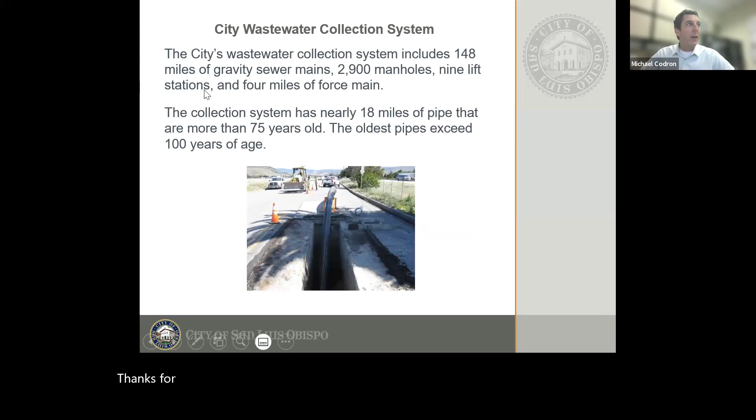Thank you, Michael. To kick it off, quick introductions: my name is Chris Lehman, I'm the Deputy Director of the Wastewater Division for the city. Also on the call with us is Ryan Beech, the Wastewater Collection System Program Supervisor. We have a few other people on the call as well who might be able to answer some specific questions - Miguel Barcenas, our Deputy Director of Engineering and Planning, and also our Utilities Director, Aaron Floyd.

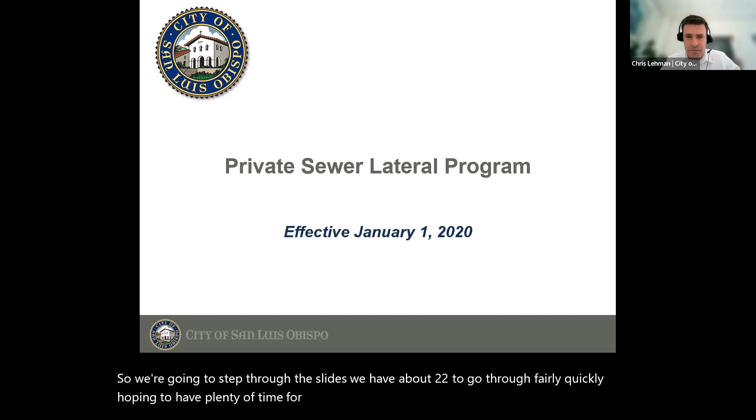We're going to step through the slides - we have about 22 to go through fairly quickly, hoping to have plenty of time for questions, but feel free to stop me if you have one specific to the slide. Ryan's going to kick us off with a little bit of background about our collection system.

From the first slide, this program was implemented January 1st, 2020. We've done a lot of work so far. The city's wastewater collection system includes 148 miles of gravity mains, 2,900 manholes, 9 lift stations, and roughly 4 miles of force main. The collection system has nearly 18 miles of pipe that is more than 75 years old, and the oldest pipe in the system is over 100 years old.

So from that slide - a super old system, a lot of maintenance. Surprisingly, some of that pipe, 75 to 100 years old, is still working, and that's pretty much it.

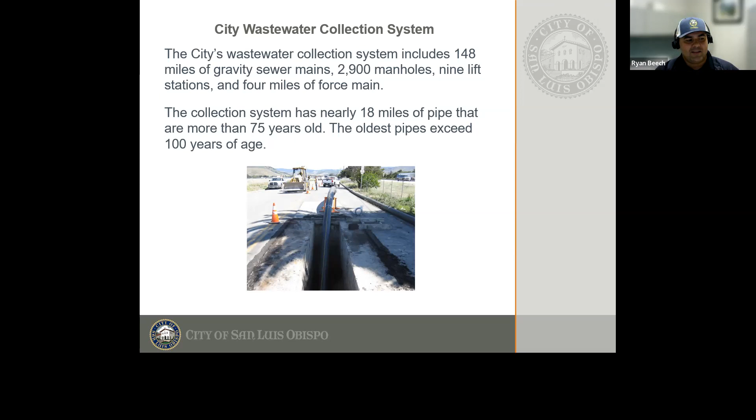Since 2007, the city has invested approximately $33 million in upgrades to the collection system. Again, a lot of aging sewer, a lot of work out there. This is a picture of our Laguna lift station - a lot of that money is going into new lift station construction and replacement.

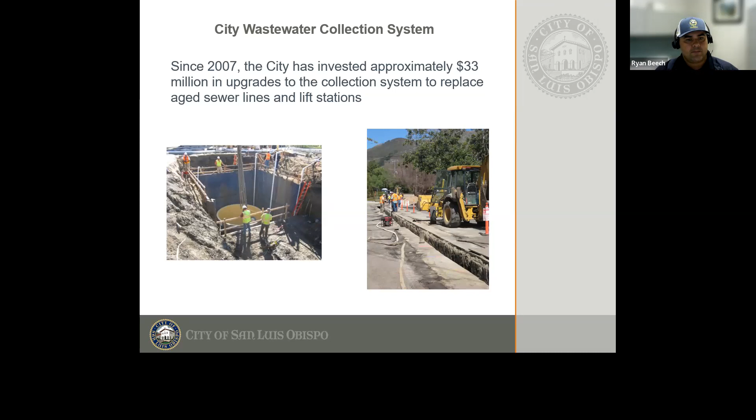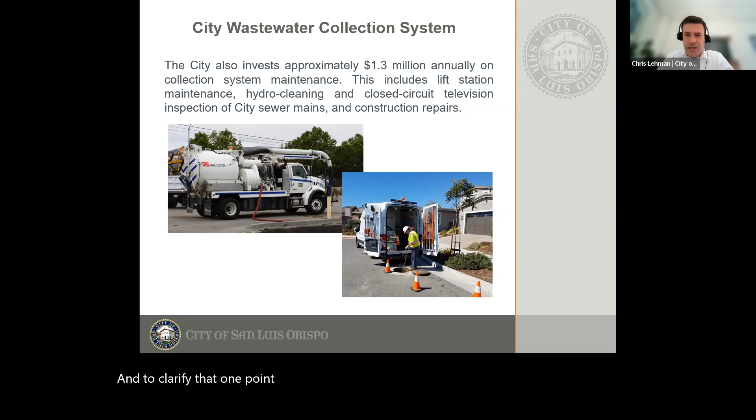The city has invested approximately $1.3 million into the collection system - into lift station maintenance, hydro cleaning, CCTV inspection, and just day-to-day construction repairs to the system. To clarify, that $1.3 million is annual, our operating budget. The $33 million is capital improvement projects.

Thanks, Ryan. I'll take it back for a few slides. That leads us into our topic for today, which is the private sewer lateral program. I wanted to start with a little bit of background on how we ended up where we're at today. A lot of this is probably a refresher for most people on the call, but I thought it was important to start with the origin of the program. There's a lot of information on this slide, but essentially the program's intent and goals are to prevent sanitary sewer overflows.

We have a series of permits issued by the water board that we have to maintain as far as treatment and conveyance. We also have third parties like California River Watch, advocacy groups looking out for environmental protection. This all started in 2015 when we were issued a notice of violation, and they intended to file suit under the Clean Water Act against the city. So after a series of negotiations and a lot of work with River Watch, we ended up with a settlement, and that is the foundation for the program as we have it today.

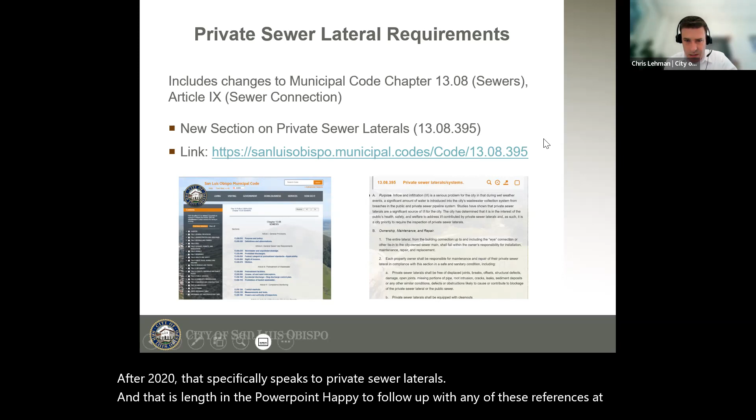Everything we're talking about today is referenced in our city municipal code, and there's a new section after 2020 that specifically speaks to private sewer laterals, which is linked in the PowerPoint. Happy to follow up with any of these references at a later date, but we will get into some of the specifics of this chapter.

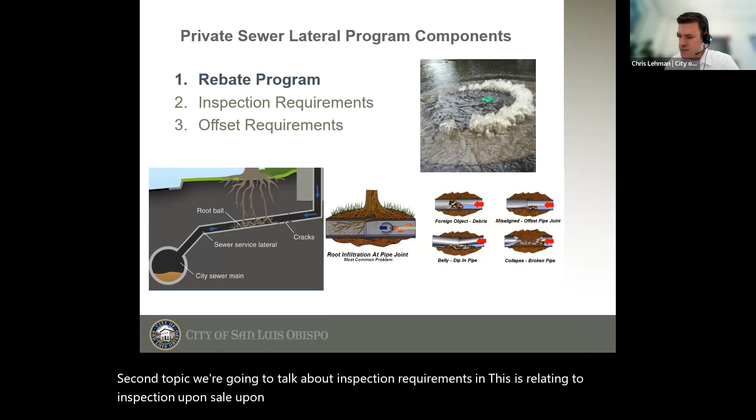The first program we're going to talk about has really three elements to the private sewer lateral program. We'll discuss rebates that incentivize private homeowners to replace laterals that might be in poor condition. Second, we'll talk about inspection requirements relating to inspection upon sale of a property. Then we'll end with the offset requirements for development and intensification in what we call our capacity constrained basins—areas throughout the system where we don't have any more room in the pipe for additional flow.

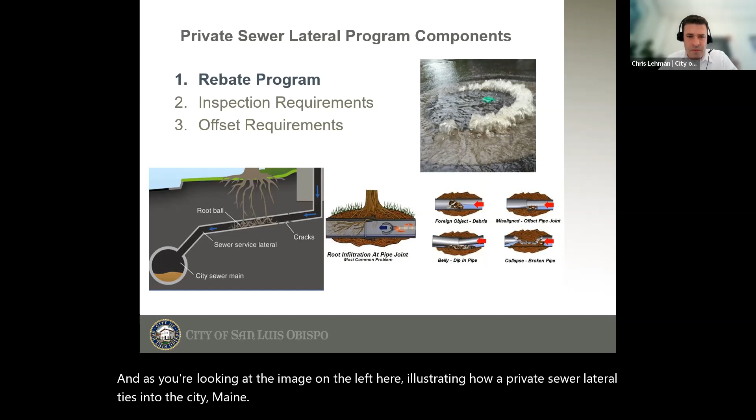Before we get into that, a couple of images here trying to illustrate the root of the problem, no pun intended. The image on the left illustrates how a private sewer lateral ties into the city main. There are several issues, but some private sewer lateral failures relate to the condition of the pipe, and depending on the type of material, pipes can be more or less susceptible to root intrusion. For instance, if you get a crack or a failed joint in a clay pipe, that's an easy spot for roots to get into the system, causing blockages from root intrusion.

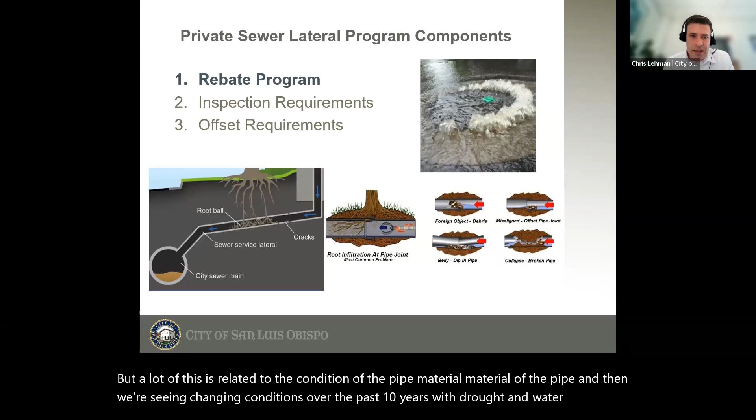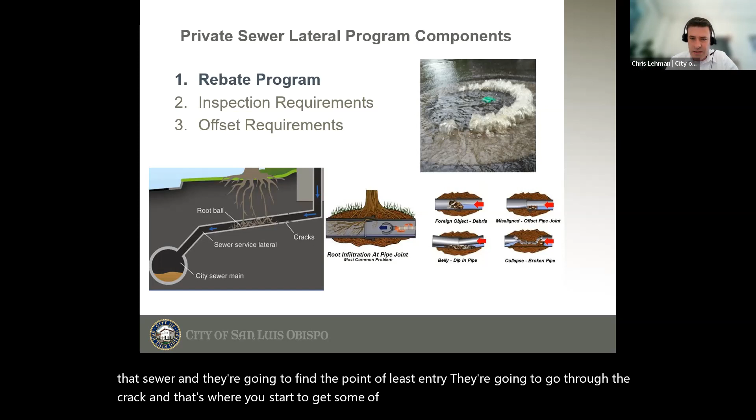There's also a series of other poor conditions, but a lot of this relates to the condition and material of the pipe. We're also seeing changing conditions over the past 10 years due to drought and water conservation. Observations we've seen in SLO, and really statewide, show that with a lack of water, roots seeking groundwater will go right into the sewer system and find the point of least entry—going through the crack—and that's where you start to get blockages. The upper right-hand image is a picture of a manhole.

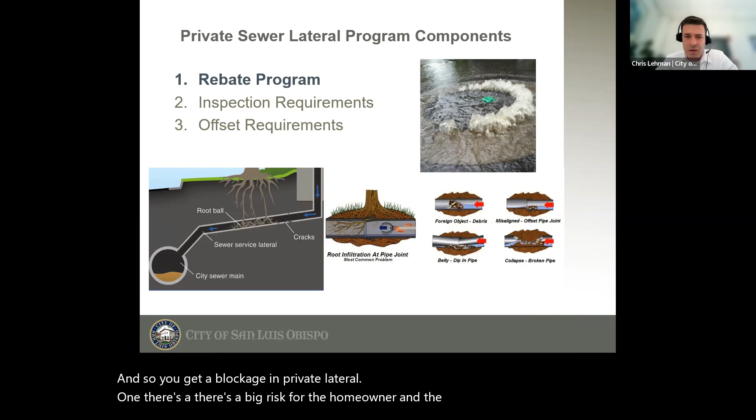Manhole that's overflowing, and this is again the root of the problem, sanitary sewer overflows. You get a blockage in a private lateral. There's a big risk for the homeowner and property owner—it could back up into the home, flood, and present hazards to human health and property. Then out in the sewer main, these are the events that have overflows, and this is what we're trying to prevent, keeping the wastewater in the pipe and getting it to the wastewater plant where we can treat it properly.

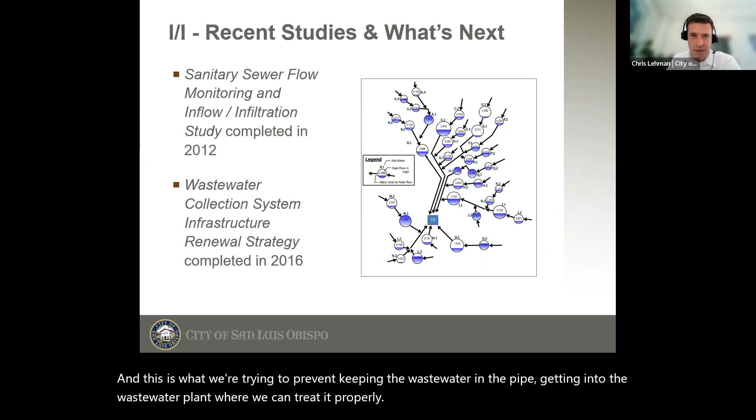With that, I've got a couple more slides here. So what else is the city doing to address this problem? One, we use data—a lot of data to make decisions and planning for development.

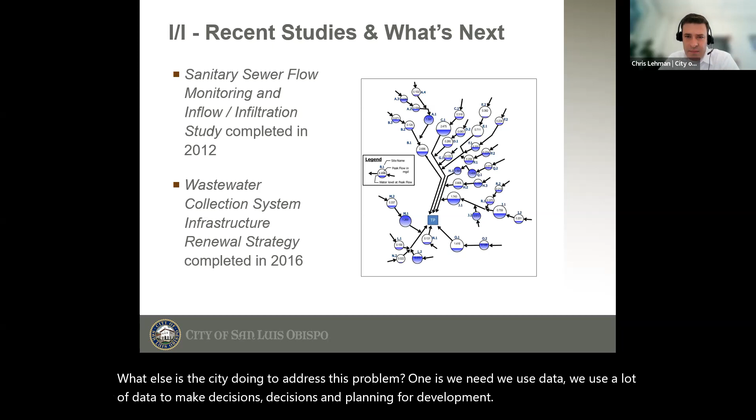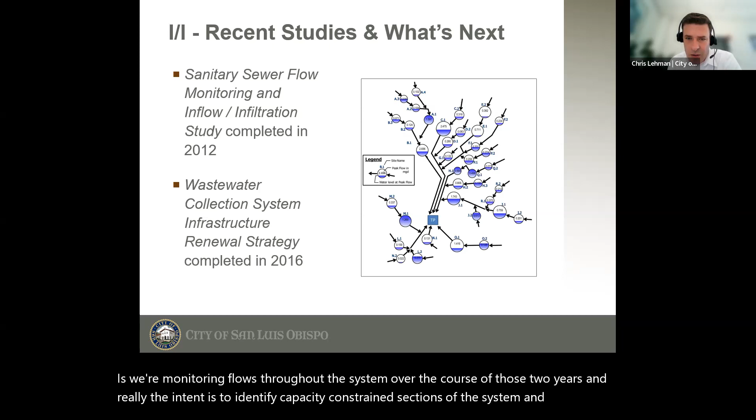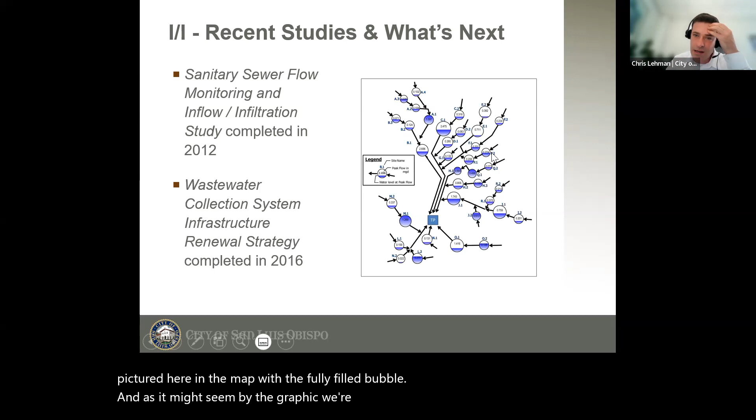Taking a step back, more than 10 years ago the city completed a system-wide flow study. The graphic on the right illustrates the highlights of flows throughout various components of the system. With that flow study, a two-year long data collection event, we monitored flows throughout the system over the course of those two years. The intent is to identify capacity constrained sections of the system, pictured here on the map with the fully filled bubble. As the graphic shows, during high flow events, when we get additional rainwater in the system, there's literally no more room in the pipe.

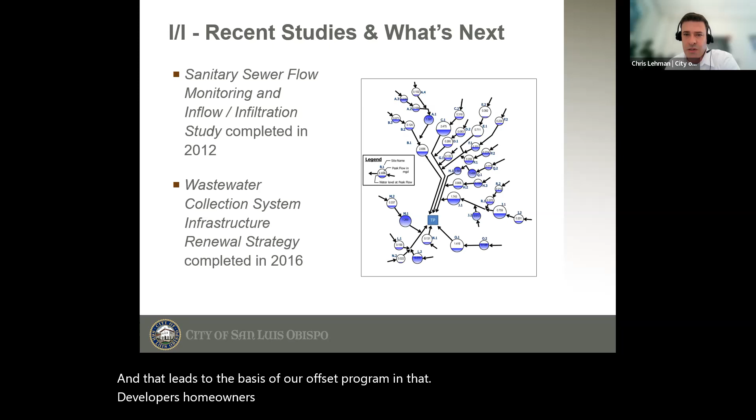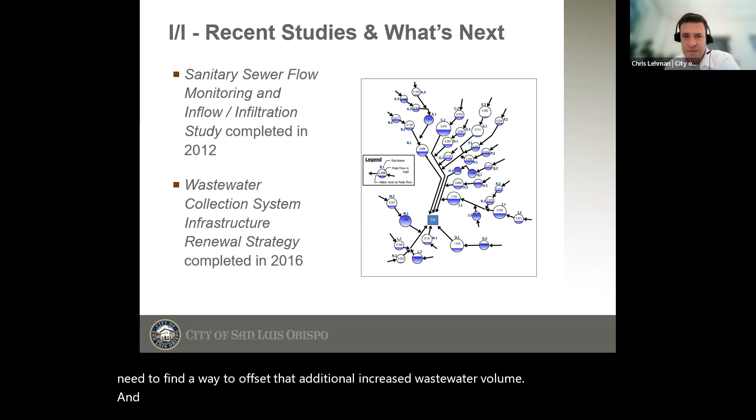That leads to the basis of our offset program: developers and homeowners wanting to add additional wastewater generation to the system need to find a way to offset that increased volume. That leads to the offset program. This study resulted in a master plan for the collection system, which we call the infrastructure renewal strategy—just a different term for a master plan for the collection system.

The city is getting ready in the next month to advertise an updated flow study. We'll take the data generated in this study, the hydraulic model of the system, and update it based on current conditions. Based on what we find, that will drive the direction of the program for the next 10 years.

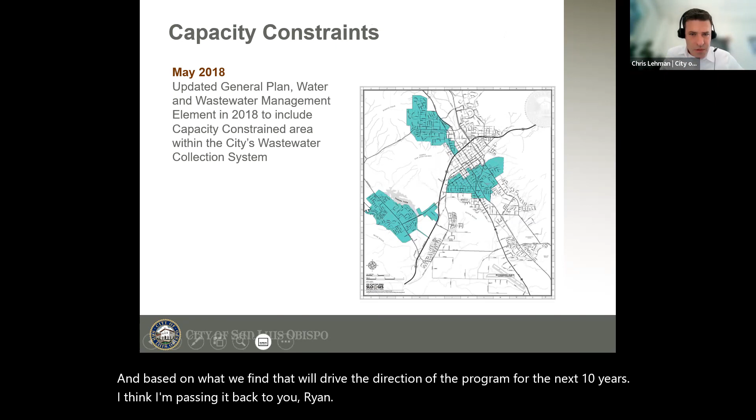And I think I'm passing it back to you, Ryan. Or do I have one more? I'll take over this slide, that's fine.

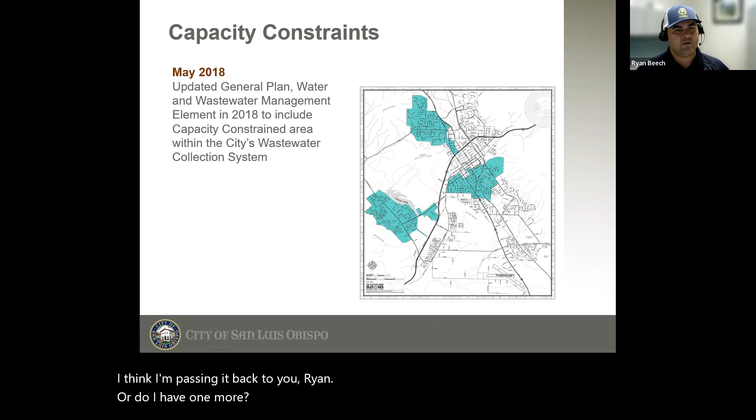So these are our capacity constrained areas. From the map you guys saw before, showing pretty much the whole system, the pipes with different amounts of flow—we calculated all of this data and determined that these sections of the collection system and sections of town are considered capacity constrained areas. These are considered high risk during rain events for any construction or development. If you're trying to build a home or add an ADU, you may have to do an offset in these areas because we can't add any additional flow to the system there.

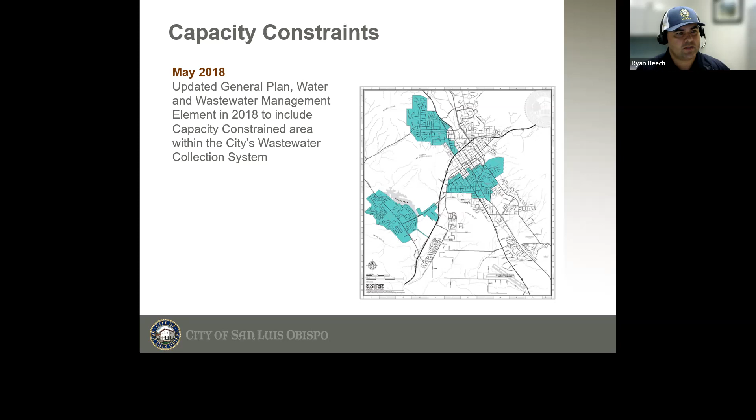So, to help limit impacts to these areas and reduce the amount of I&I and root intrusion into our sewer mains, we chose to create the rebate program. For a single family residence in a capacity constrained area, we're giving a $3,000 rebate for the replacement of the lateral from the property to the city main. Anyone outside the capacity constrained areas gets a $2,000 rebate. On top of that, we're also waiving the wye fees.

So when you go uptown and pull your permits, we are not charging you a wye installation fee. Anytime you want to do work on your sewer lateral and tie into the sewer main, we have wastewater collection staff come out, cut into the main, and do that portion of the work—we don't charge the homeowner or contractor for that wye installation or that work.

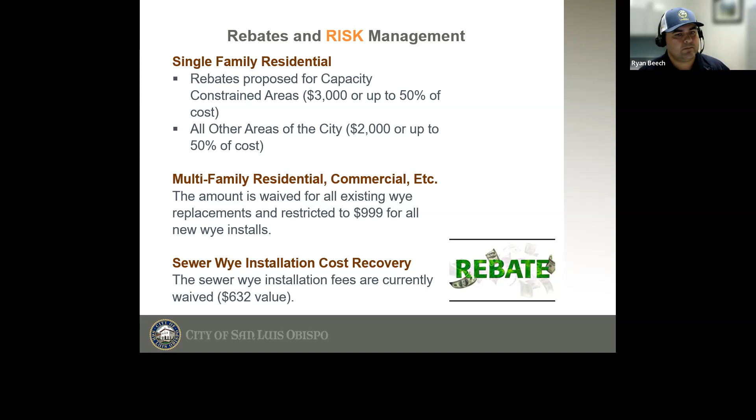Anytime you're doing work that needs inspection, like adding an ADU or doing a home remodel, you're going to see my name on the permit. I'm going to ask you for a lateral inspection if we don't have updated information on that sewer lateral, and I'll be looking for any defects to see if that lateral meets our current specs and standards. If it doesn't, I'll request that you either repair a certain section of that sewer lateral, or you'll have to replace the entire sewer lateral from the home to the city main.

So when is an inspection required? Anytime a property is sold within the city of San Luis, they are required to submit a video inspection. If we have up-to-date information on that sewer lateral, or if they've submitted an inspection within 5 years, we are not going to require that. Or if the lateral is newer than 20 years, it all depends on age. There are a couple factors. Not all properties have to submit it, but the majority of the homes have to submit a lateral inspection prior to the sale.

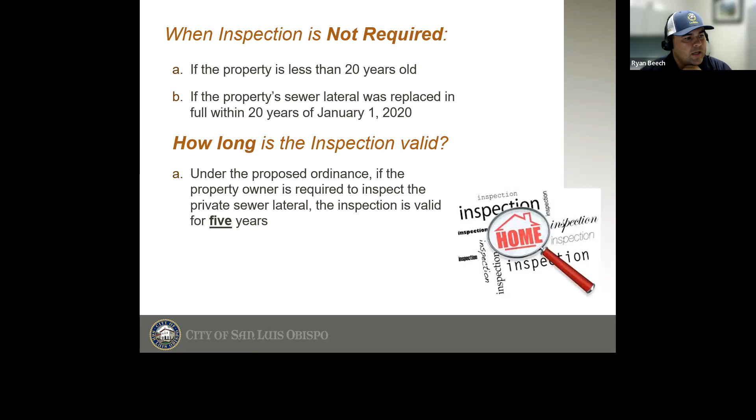So when is inspection not required? Like I said, if the property is less than 20 years old, or if the property's sewer lateral was replaced within 20 years. And how long is the inspection valid? 5 years. Next slide.

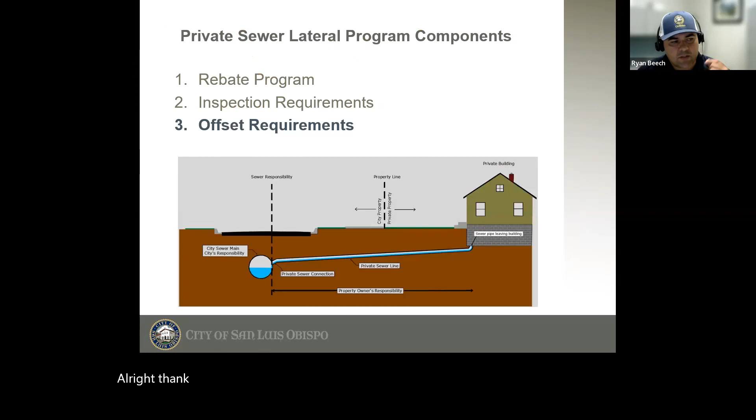So I believe we already went through this slide, Chris.

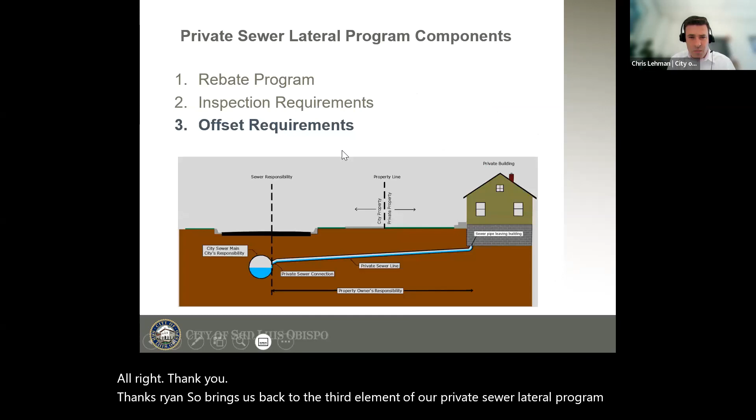Thanks, Ryan. This brings us back to the third element of our private sewer lateral program, and we call it the offset program.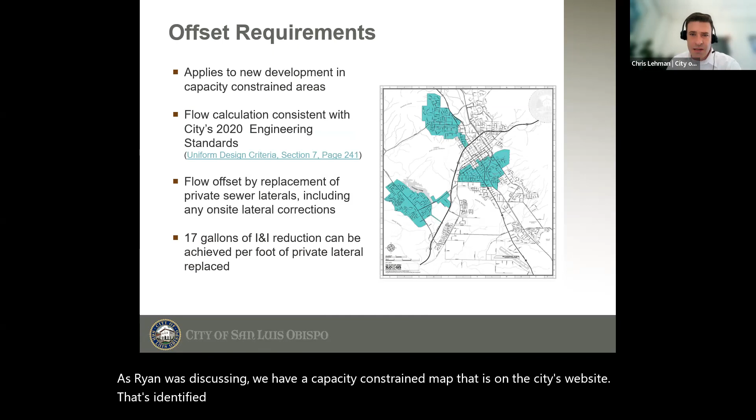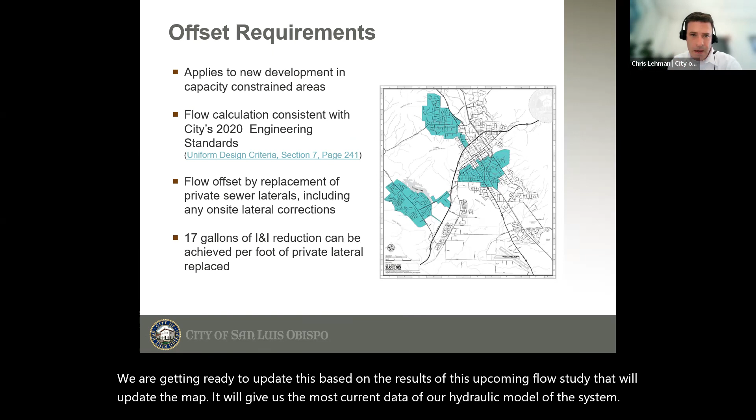As Ryan was discussing, we have a capacity constrained map on the city's website, identified by the teal shaded portions of the map. We are getting ready to update this based on the results of an upcoming flow study that will give us the most current data of our hydraulic model of the system. The offset requirements are related to capacity in these basins, where there's not enough room to safely convey wastewater to the wastewater plant.

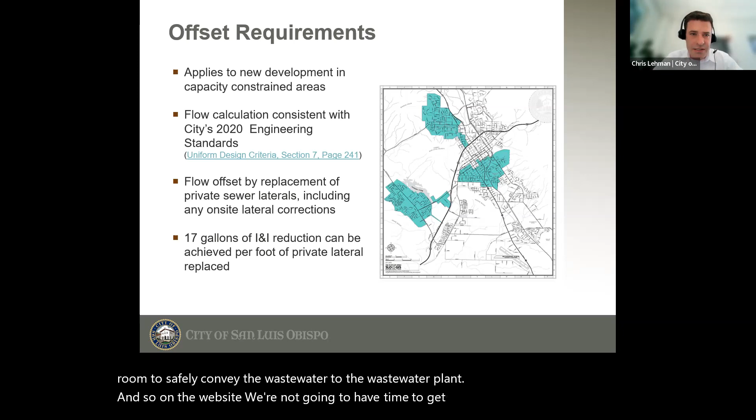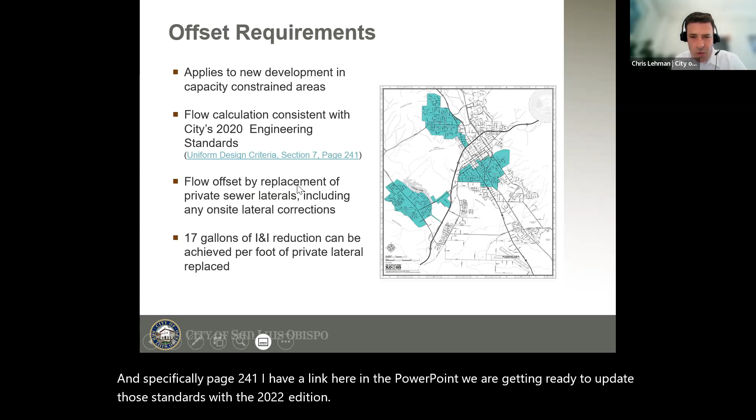On the website, we're not going to have time to get into much detail, but everything stems back to the website and the resources posted there. As far as how to calculate required offsets, that is listed in our 2020 engineering standards and specifications, specifically page 241 - I have a link here in the PowerPoint. We are getting ready to update those standards with the 2022 edition, and we'll provide that link and updated resource when we get it.

At a high level, about 17 gallons of infiltration and inflow benefit comes from replacing 1 foot of private sewer lateral. So those are some of the numbers we're working with.

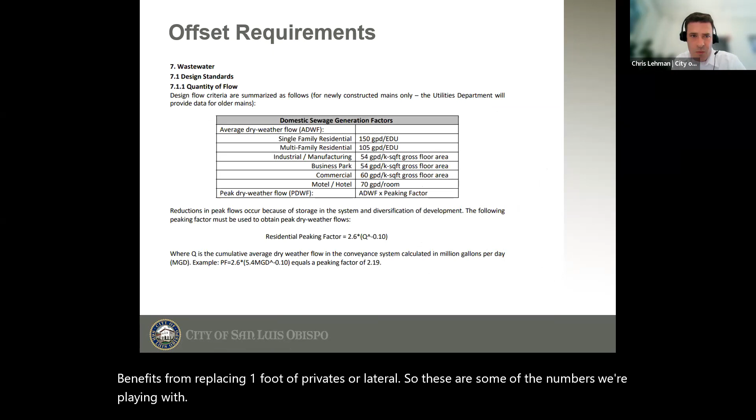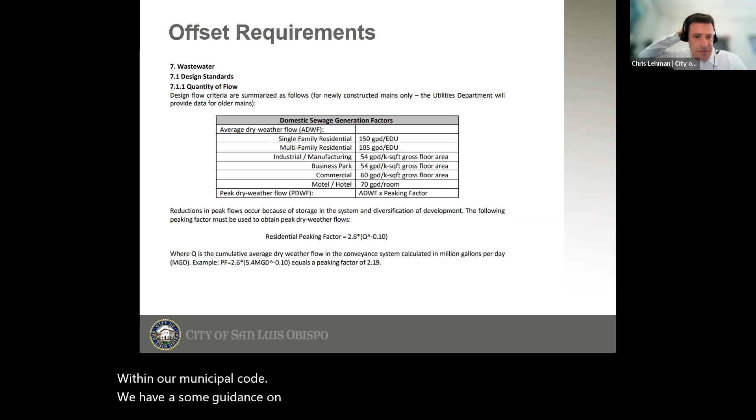Within our municipal code, we have some guidance on calculating factors for your offset. Here's an example of that. This is on the city's website as well, municipal code, chapter 13.

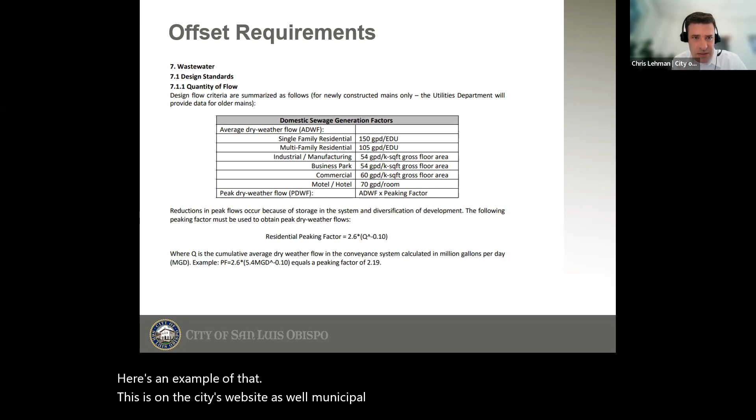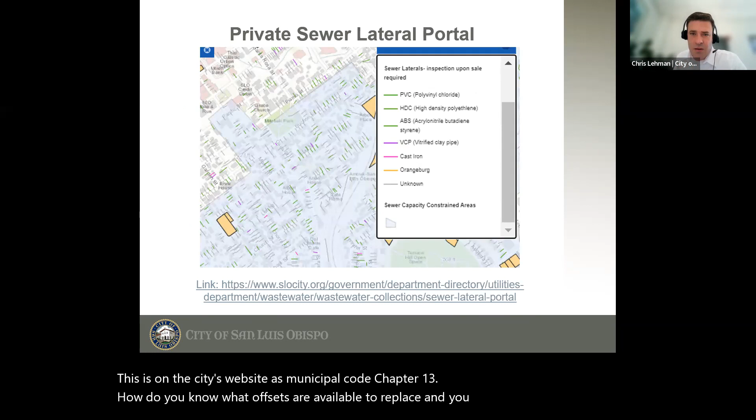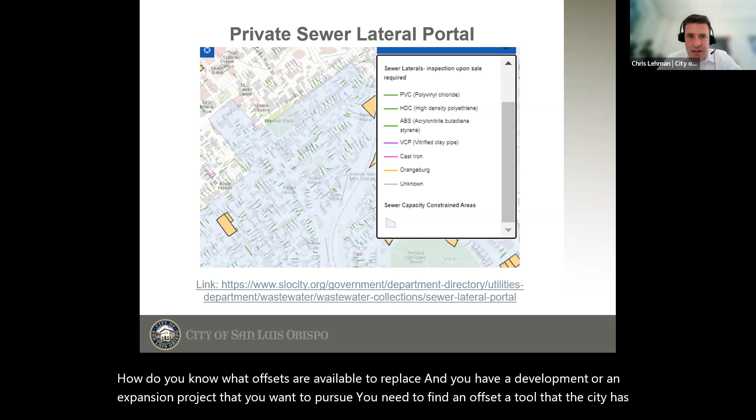How do you know what offsets are available to replace? If you have a development or expansion project that you want to pursue, you need to find an offset. A tool that the city has put together and provided is our private sewer lateral portal. This is a real-time map of the latest conditions that the city has. As we get updated conditions, this map will update in real time. As illustrated by this map, you can see green conditions.

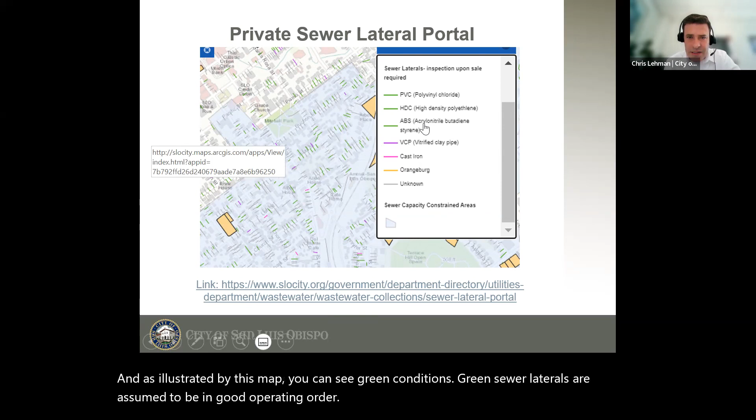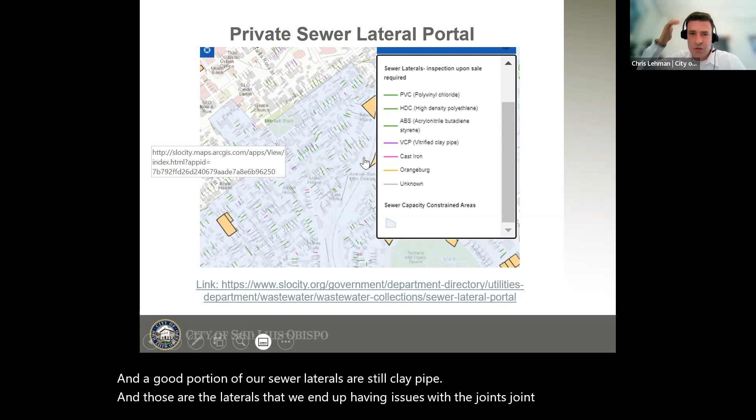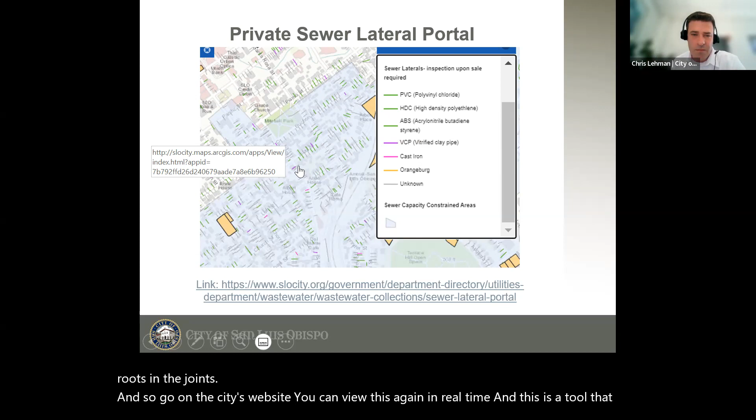Green sewer laterals are assumed to be in good operating order. A lot of this stems back to the type of material of the sewer lateral. We know we have major issues with clay pipe, and a good portion of our sewer laterals are still clay pipe. Those are the laterals where we end up having issues with joint failure, and we get roots in the joints. So go on the city's website, you can view this again in real time. This is a tool that was implemented to help find offsets in these basins that require offsets for development and intensification.

Other things the city is doing: right now we have made headway in reducing infiltration and inflow throughout the system, but we still have a major problem. One of the methods of attacking and addressing that additional flow is back at the water resource recovery facility.

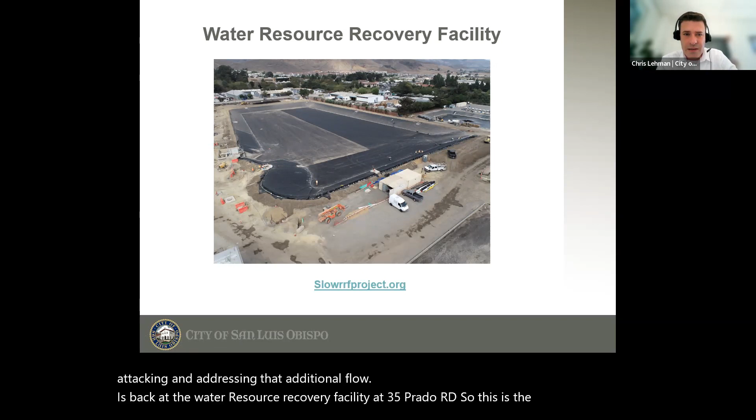That's at 35 Prado Road, the city's wastewater plant, currently in a 4-year long, $150 million capital improvement upgrade. A portion of that upgrade is to expand what you see here in the picture.

We've expanded what we call an equalization pond. This pond accommodates the surge flows we see during a rain event. Where we might normally see 3 million gallons of wastewater a day at the plant, we might see upwards of 15 million gallons during a rain event.

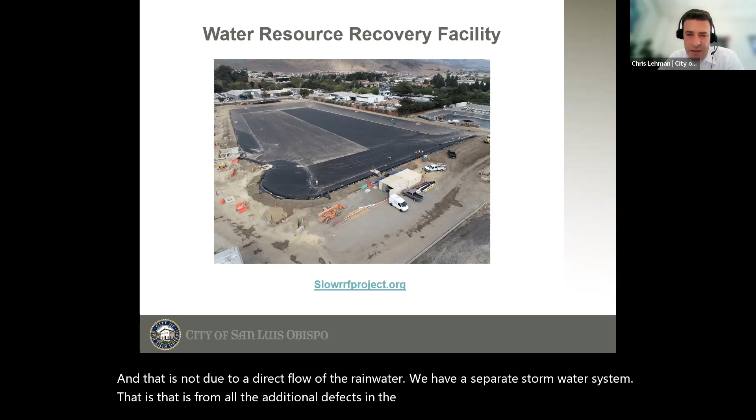That is not due to a direct flow of rainwater. We have a separate stormwater system. It's from all the additional defects in the sewer system, so we're getting rainwater into the sewer and we have to treat it. Without sizing the plant at that 15 million gallons, we need to find some way to accommodate that peak flow. This has been the strategy to date.

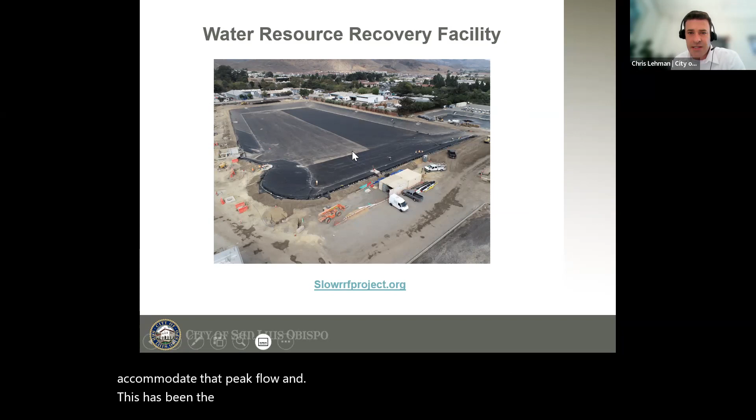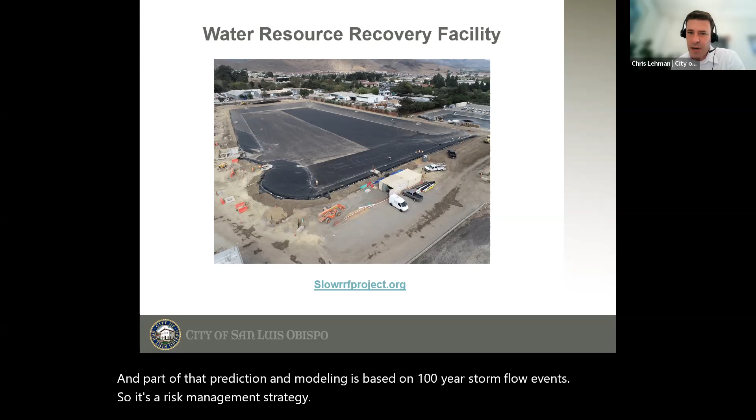This basin was previously sized at 4 million gallons. As part of this upgrade, we've expanded it to 8.5 million gallons, and part of that prediction and modeling is based on 100-year storm flow events. So it's a risk management strategy, but it's all centered around the infiltration and inflow we're getting largely through the private defects in the private lateral system.

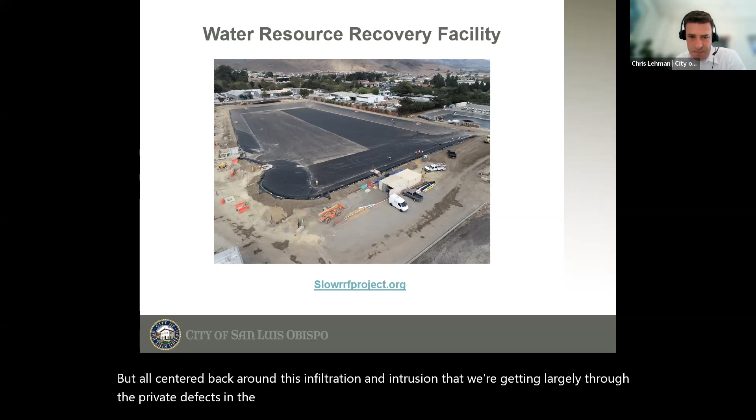If anyone's interested in learning more about that project, we have a link here to the project website, slowrrfproject.org.

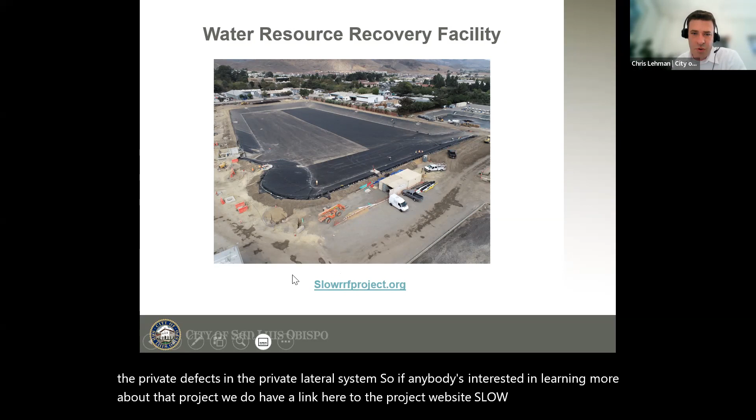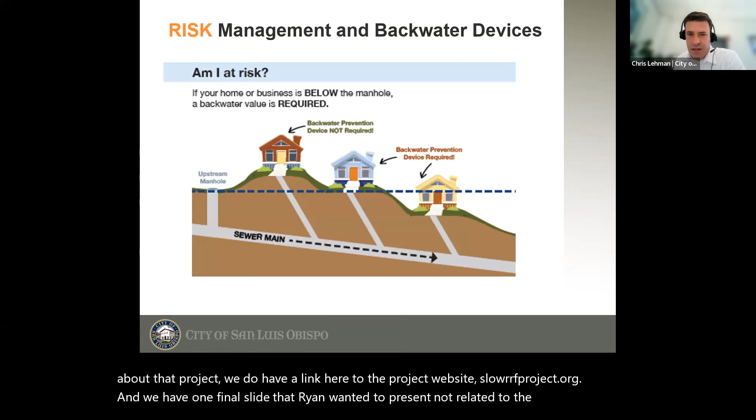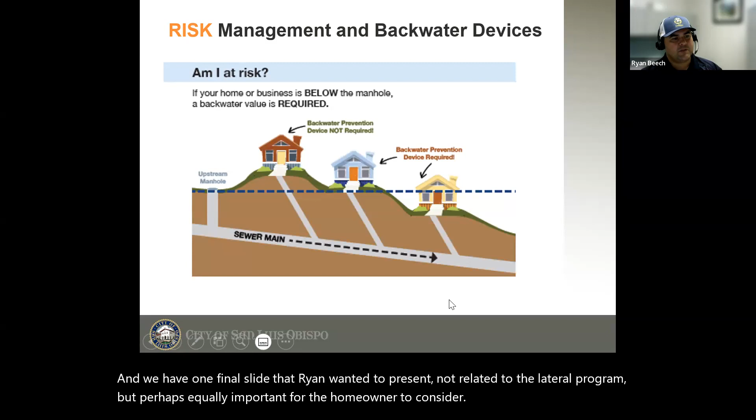We have one final slide that Ryan wanted to present, not related to the lateral program, but perhaps equally important for the homeowner to consider: backwater devices. Anytime you're replacing or repairing a sewer lateral at a property, make sure it has a backwater device attached to it. It's part of the plumbing code, and it's also in the city muni code and our specs and standards.

We've seen a rise in damages caused by sewer blockages. It could be from roots, it could be from I&I events. If a property does not have a backwater device installed on the sewer lateral, it's going to back up in the house and cause serious damage. Depending on the issue, the city is not going to cover those damages, because that's on the California Plumbing Code and it's in our specs and standards.

So just keep an eye out. If you're building new properties, make sure the backwater device is installed if it meets this criteria.

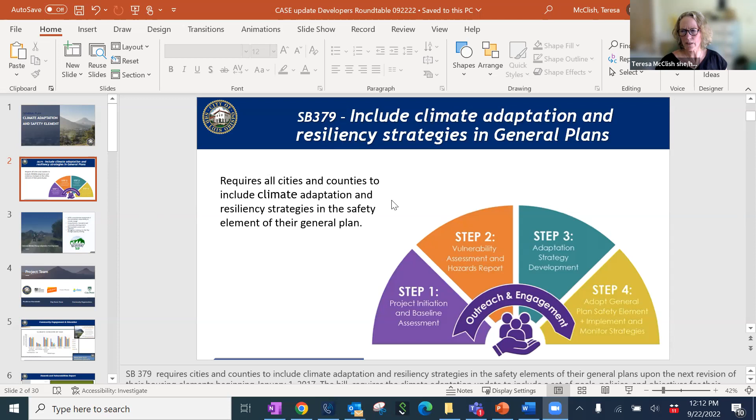The main Senate bill that drove this is Senate Bill 379, and the climate adaptation grant was very instrumental. It was over $400,000 to help us do the technical modeling, and to help us assess and make sure we had a really good data-driven basis for policy. We were able to use the best available science and practices, and we worked with our Local Government Commission, now Civic Well, who helped us tremendously in assessing the best ways to strengthen community resiliency.

A big part of this also regards environmental justice. Environmental justice is also an element of the general plan that the state is, in some cases, requiring communities to insert into their general plan. So we are inserting it into our safety element, as many people are. It really was pervasive through this process, and it's important in looking at our disadvantaged communities, and making sure we were inclusive and equitable in terms of what we're proposing.

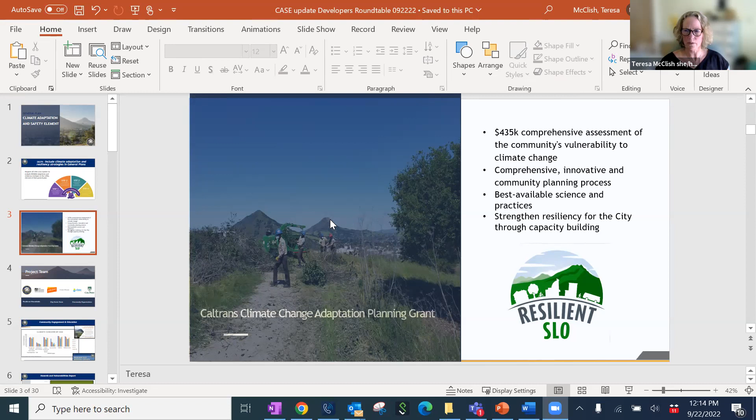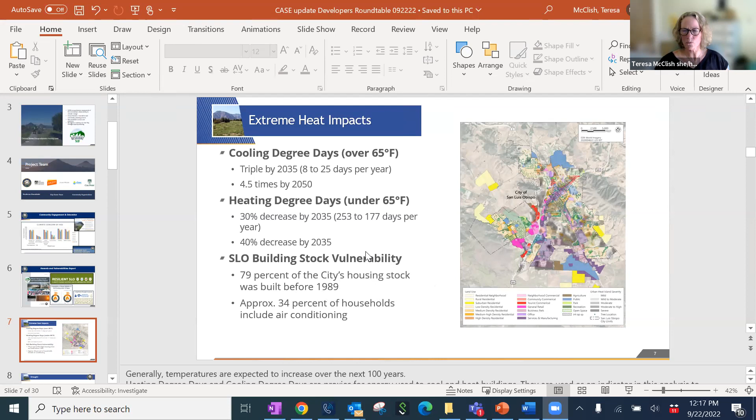I'll just run through a couple slides—it's just going to get hotter. Certainly the communities around us are going to see bigger increases, but that will also affect us. We took a look at what that means for our building stock. Most of it was built prior to 1989, and we're not necessarily well stocked with air conditioning. That's recognized as one of the many things in the report.

Our safety element won't delve too much into drought, because we have a whole other chapter in our general plan for water resources that includes drought considerations. But it was factored in, certainly in terms of this whiplash and the extreme events we'll likely see going forward, including drought for our area.

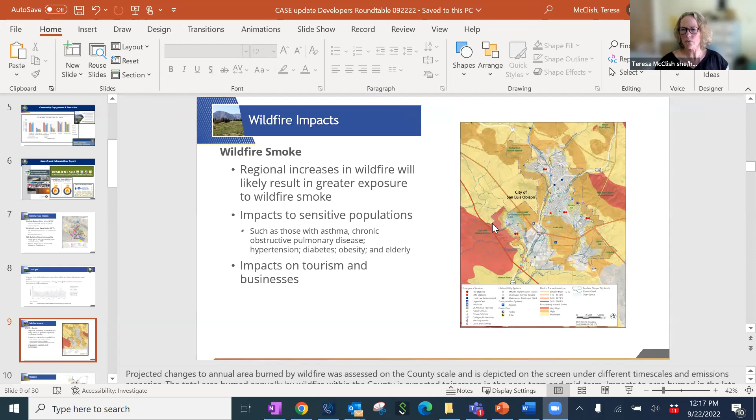Wildfire was certainly considered, as is wildfire smoke in particular, and how that will affect our sensitive populations and impact our tourism and business communities. Those are also identified and elaborated on in the report.

Flooding—you're all very familiar with historic flooding and how that's used to inform building practices. Well, we looked forward decades, and then decades and decades further into the future, based on rapidly developing climate models, and mapped them.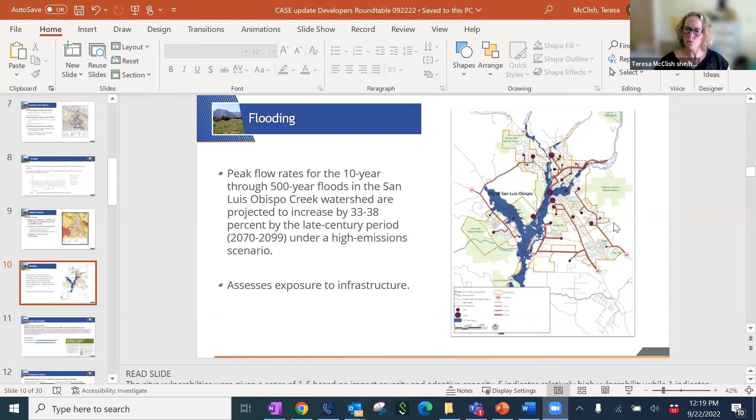We can see we'll probably see very prolonged drought events, but the flooding events may be more concerning. We have an analysis of likely flood scenarios in the report, exemplified by several mapping exercises that we're using to inform our policies going forward.

We also looked at what folks are doing elsewhere, what's developing in this area in terms of adaptation, and those ideas are built in. We have an adaptation booklet to generate ideas, and we're using those in conjunction with the information we've gathered to inform what we want our policies to be going forward.

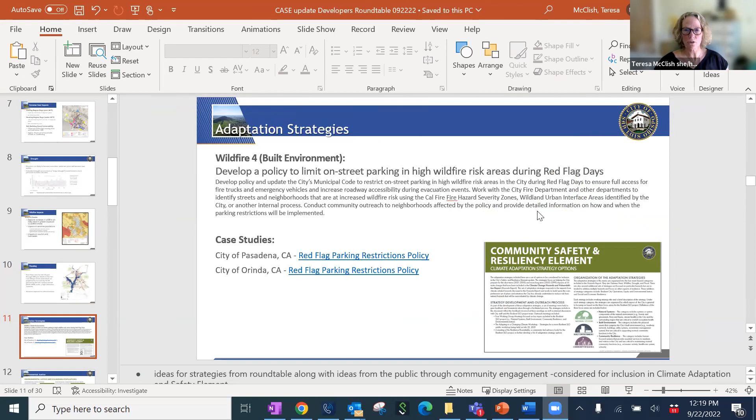Again, we were very specific and intentional about environmental justice. We used new information from the San Luis Obispo Council of Governments—they did a study mapping disadvantaged communities in San Luis Obispo. We overlaid those maps with our hazard areas so we can really see how hazards may disproportionately affect disadvantaged communities in the city.

I mentioned before that there are certain statutes passed in the last few years that we're paying attention to in our safety element. For example, SB 99, which requires every city to have policies ensuring two points of access for every neighborhood. This is one of several laws we're making sure we're adhering to in this effort.

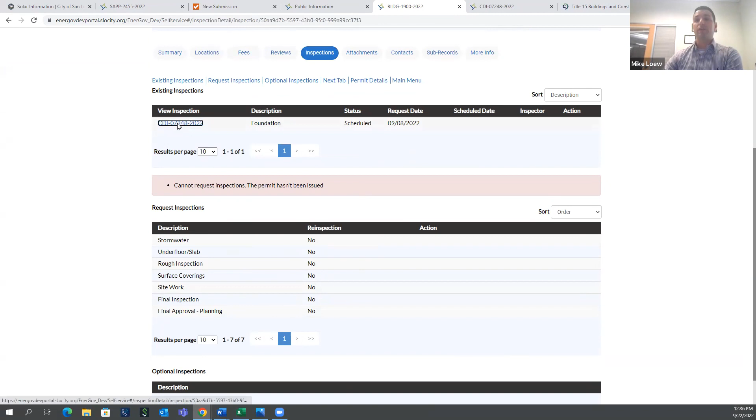When you're accessing it, even from the public, you're going to be able to go into your project and click on inspections. This is where you'll see the different types of inspection categories. They're often not going to be closed until the end of the project, but you'll have the option to click on specific inspections and find a checklist, bringing up what will now be a digital record and inspection card. This is going to be, and actually already is, available on all projects—it's just that we haven't changed our business process to use it this way yet.

So in the next 2 weeks or so, this should be a feature available on all new and active projects. Basically, maybe you'll have 3 things being looked at with a framing inspection, and 2 of them pass. That could be indicated in comments—we'll be able to change that specific inspection to 'passed.' Maybe there were a couple of items that needed to be corrected; that will be captured there as well. So your list of things that have passed and where work can move forward will be listed there, along with the deficiencies that need to be corrected.

We're hoping that by making this information available to the public, it will clear up some of the concerns we've received when the information shown is either a partial pass or a failed inspection. Maybe a potential home buyer watching the progress of their newly constructed home gets a little concerned about inspections not passing. Us being able to open this up gives all that information and shows, oh actually no, these corrections are being made, these inspections are being completed.

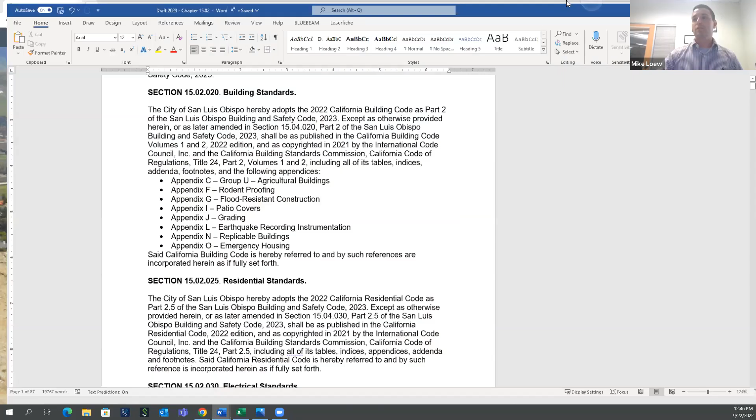We'll have a specific section that adopts a specific individual code, and then gives anyone who's reading it the specific information they need about that code. Where you'll need to find the amendments for the code will be listed in this section, which model code it is based on, and that's in case you need to access commentaries for the code, and then the specific appendices that we will be adopting with the code.

We kind of had a reverse process before, where we just adopted the code and then went through and deleted the appendices that we didn't want. So instead of doing that, we'll be adopting the specific ones, listing it all here, and then having an actual section for each code.

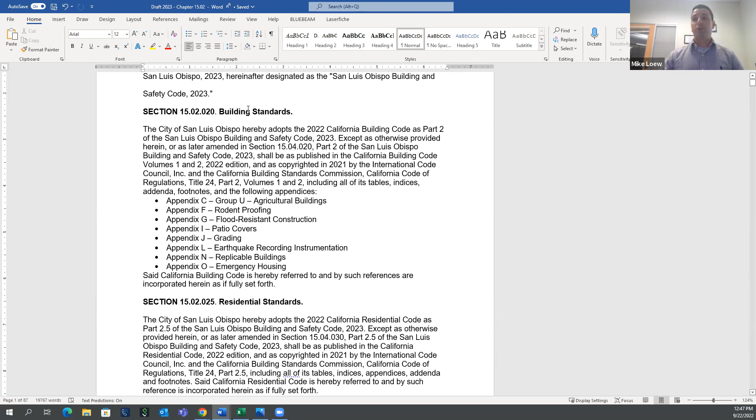So building code will be 020 and correlate to part 2. Residential standards will be 025 and correlate to part 2.5, and so on and so forth. So more of a structural change than an actual change with the content.

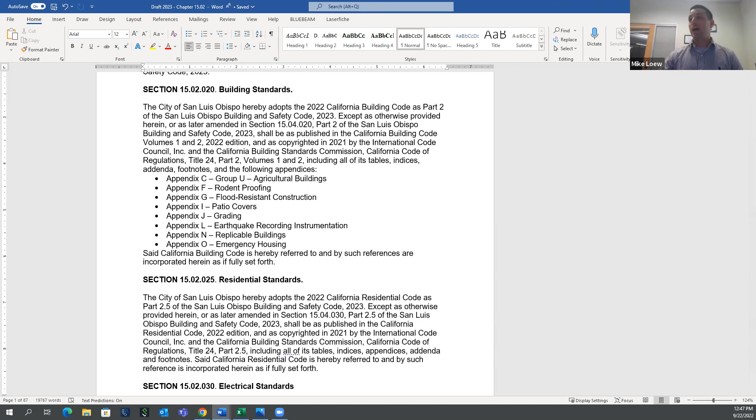The other part with that is we'll be producing a matrix. This matrix is going to break down and have every single amendment that we have, where you'll find it in the municipal code, which section it correlates to in the actual model code, and then a description of what it is, whether it's new to the code, an addition, amendment, or deletion, and then it's assigned a finding as well. So while I have this Excel spreadsheet up, I'll just take a minute to go through a couple of the changes.

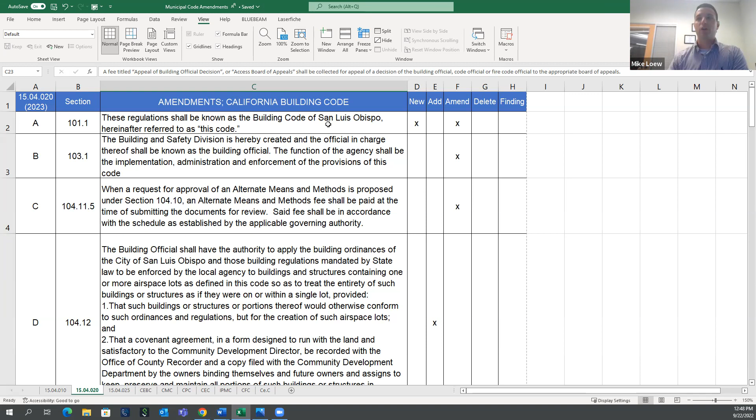It's really just a cleanup phase. There are a number of areas in the code that have blanks where we were supposed to fill in. So some of the new additions are going to just be us adding our name into the code.

The most significant one that was actually listed by the state is that permits are no longer expired after 6 months, but 12 months. So we're just updating our municipal code to reflect that as well. This was actually a change that came mid-cycle, and I suspect due to supply chain issues from COVID, giving builders a little more time on projects is going to help them out a little bit.

And then again, changing a couple of language. This is where we've already had a fee, but it was previously identified as a handicap board of appeals. We're taking that word out to be a little more inclusive and adding the word access instead.

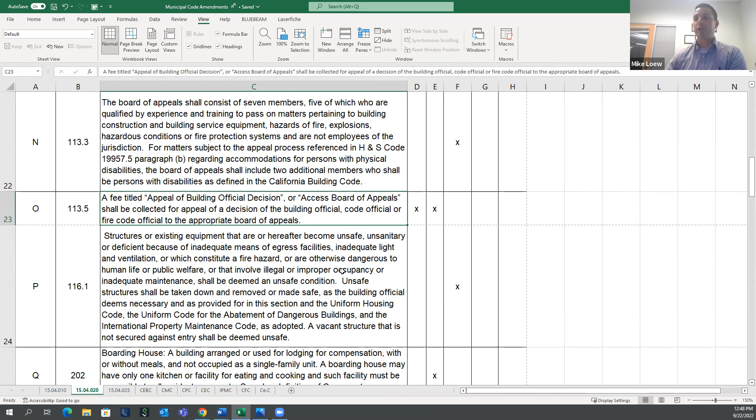And then this is probably the biggest change to the building code. Currently, we have the amendment in 903.2 that requires all buildings to be sprinklered with a few exceptions. What we're doing in that municipal code section is actually deleting the code and putting our code in instead. The problem with that is when we delete that code, we actually limit some of our ability to enforce what's called fire areas.

While that might not be applicable on any new projects, fire areas might be applicable on a building that we annex that doesn't have sprinklers, or maybe an older building that doesn't yet have sprinklers and doesn't have to add a sprinkler system. So we're just shifting this code section and widening our ability to enforce other codes and standards.

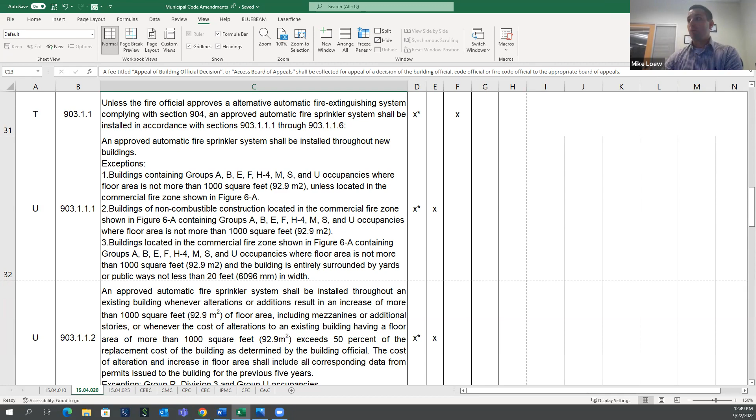There are some more significant changes to the fire code. A couple of things here that I have listed, but with Roger on the line, I'm going to give him a couple of minutes to run through what that looks like.

Thank you, Mike. This is Roger Maggio, Fire Marshal, Chief Building Official. We only have a couple of local amendments as they're posted here, and they're non-building related. They're basically delegating more authority to the chief to control certain areas and parking along roadways during hazardous fire conditions.

This gives him the authority to designate some wildland areas as hazardous fire areas and provide more control for elimination of smoking and campfires, ignition sources, and even entry into some areas that could be a critical fire danger, and temporarily post some roadways as no parking when access to those areas for increased risk is forecasted.

That can be a wind event, a landslide, fire, or any other kind of public foreseen emergency. But there are some significant changes added to the fire code regarding fire safety by the state, including the addition of an entire chapter that regulates the storage of distilled spirits and wine, which is proliferating in our area. We've had quite a few applications for wine storage warehouses and distilled spirits, and it includes a lot more building provisions within the fire code, including ventilation and secondary containment trenching.

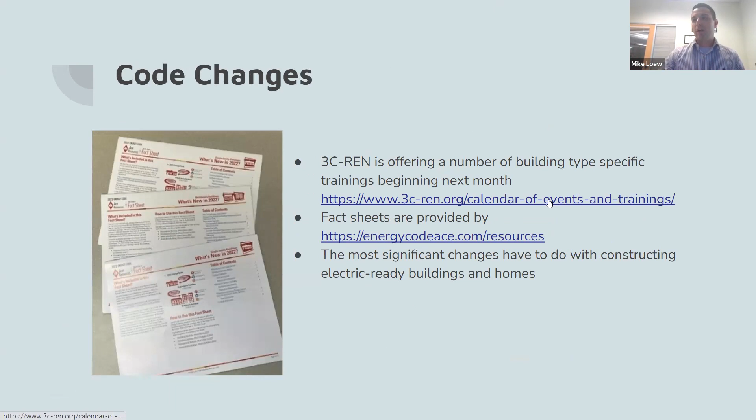But I do want to point out that 3C-REN is offering a number of building type specific trainings beginning next month. If you just go to their website, I believe it's starting on October 6th, you'll start to see 2022 energy code trainings, and that runs all the way through to December 1st.

So they have ADU-specific ones, and then they even get into single family projects, multifamily projects, and non-residential. So they have a number of trainings coming. And then there's also a number of resources available through energycodeace.com, where they produce pamphlets that break down all the new additions. You can just go on their website and download them. They're very helpful—they even helped me create this presentation.

I will say that the most significant changes have to do with constructing electric ready buildings and homes.

I'll get to that here a little bit more. The biggest change that I can identify is in non-residential now having prescriptive requirements for solar panels as well as energy storage systems. The size of the system is based on certain equations.

There's a table in the energy code that will say specifically, based on your area and type of use, what factor you'll use in those equations. For example, a 10,000 square foot retail space, conditioned, would have a factor of 2.91 in our area, so you'd need a solar system of 29.1 kilowatts.

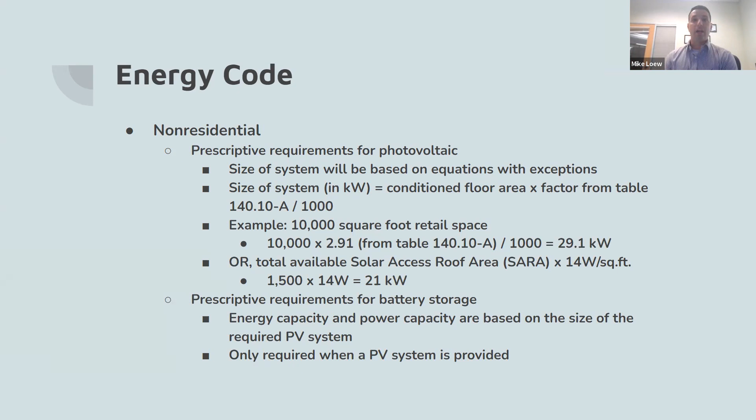So there are 2 different methods to calculate the size of the system and how you'd install it. For energy storage systems, the energy capacity and power capacity are based on the size of the solar system. There are exceptions - if the calculation comes out to a system smaller than 4 kilowatts, you don't need to provide one, and if you don't need a solar system, you don't need the energy storage system either.

Moving on to multifamily, there are now requirements for PV and energy storage systems for buildings 4 stories or more, very similar to non-residential. If you're building 3 stories or less, there's no energy storage system required at this time.

But for single family homes, energy storage systems have to be energy storage ready. What that looks like is listed here - I won't run through it since we're short on time, but it's available in those pamphlets. Basically, similar to being electric ready, we just have to be energy storage ready.

The last thing I'll mention is that our energy code amendments, also known as our REACH code, will no longer be in place because our new all-electric ordinance will be effective starting January 1st as well. Many of the changes in the energy code are meant to make single family homes electric ready, but since we're requiring all electric, those are irrelevant to what we do here in the city.

And so with 2 minutes left, I'll go ahead and open it up for questions.